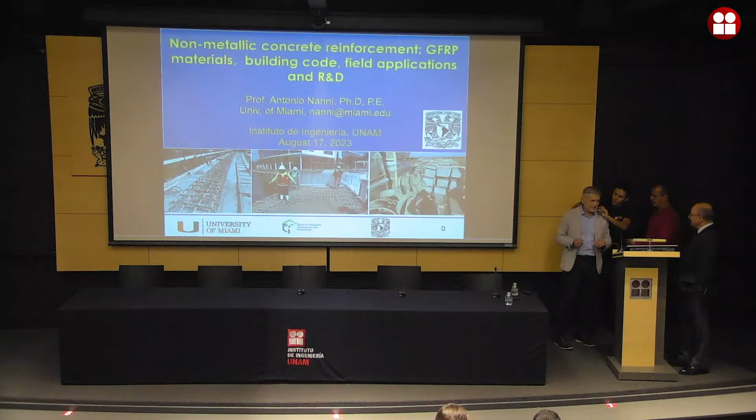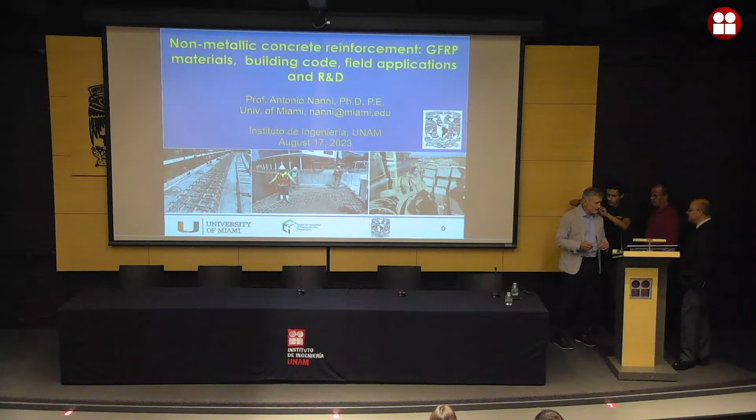That was Ronberg, okay. You will meet him, it's going to be exciting. He's not a concrete guy at all. I think it's going to be great. It's totally different from Ron, but I think he's going to be a great manager.

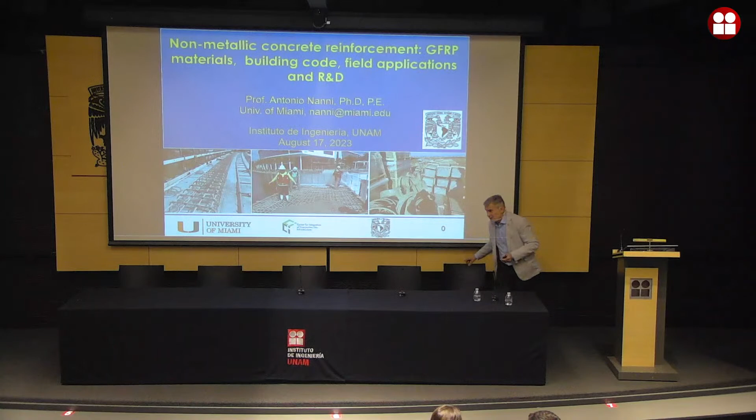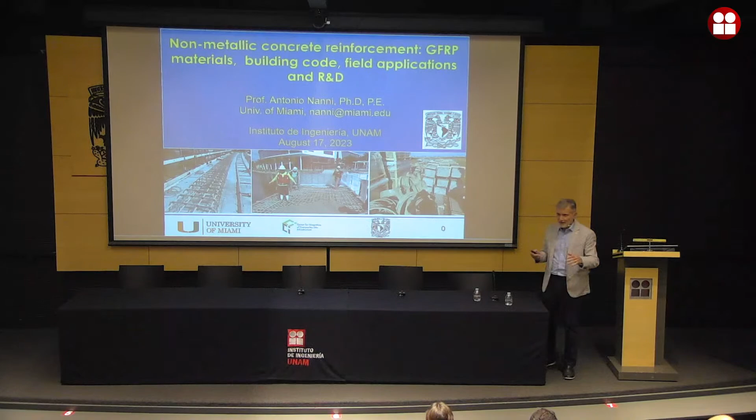So I can switch to English, and actually I typically prepare my slides half in English and half in Spanish. But today, because there are many students, you need to practice your English, so I'm just going to stick to it. This is not supposed to be a typical lecture, it's supposed to be a conversation, so if you see something you'd like to ask me about, I'm at your disposal.

So this is thanks to Professor Alcocer for this invitation. It's great, I've been around, I've seen 3 cities now. This is my second time in Mexico, but it's very, very exciting.

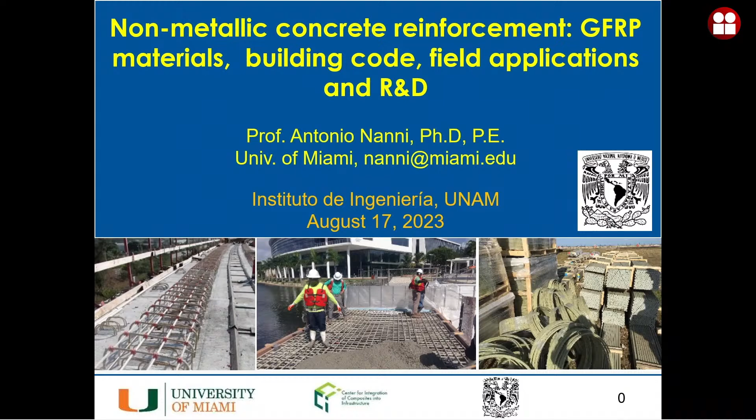The presentation I have today is really broken up into 3 parts, and it's going to be a little longer, but Sergio gave me permission to entertain you if you wish.

So the first part is really letting you know about ACI, what we're doing there, some exciting stuff, and the code in particular. And then I want to show you some field applications, because to talk about innovation without going into the field, without having real application, doesn't make much sense.

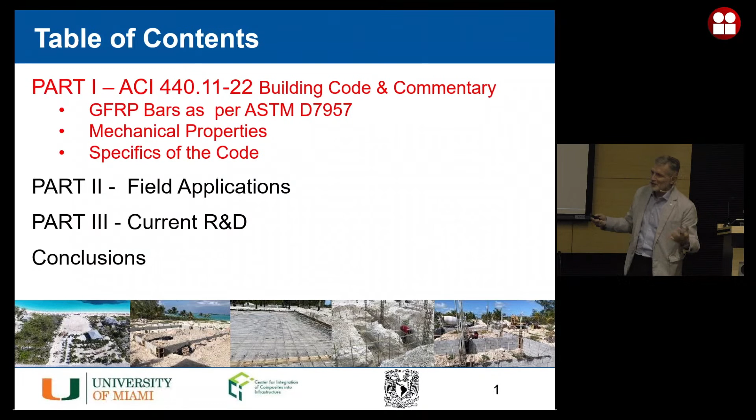And then, because Sergio asked me, I'll show you some of the research work we're doing at the University of Miami. And by the way, I'm in a recruiting mode. So if you're interested in doing a PhD in the United States, he's not looking at me, but he knows that I'm recruiting students. So please feel free to contact me.

And I will present you very quickly 3 little projects related to FRP.

So the topic of today's discussion is really composite, and in particular composite rebars. What are they? Many of you might know, but I'm just going to give you a few slides to remind you. These materials are made of fibers and resin.

The fibers that we cover in the code are glass of the type E-CR, corrosion-resistant E-glass, electric glass. And the resin that we cover is really vinyl ester of all the thermosets available, because of the durability.

The bars that we use in the code, because this is really what we're doing in ACI, follow the specification of ASTM D7957. So we have material specs that help us in defining what is the quality of the bars.

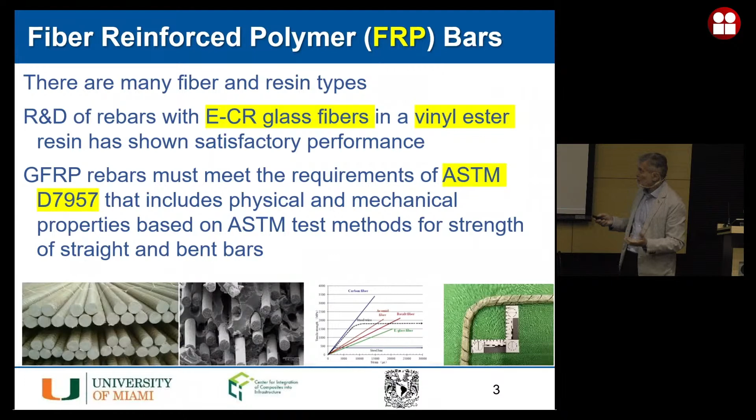The type of bars that you see in this picture are kind of unusual in the sense that if you think in terms of steel, the steel rebar's external surface has been standardized. This is not the case for FRP. They are all different depending on the manufacturer.

And the reason for that is really to give you good bond with the concrete. Without stress transfer between concrete and reinforcement, you don't have reinforced concrete, right? So this is the purpose.

The quality of the bond may not be as good as in the case of steel, primarily because of the stiffness of steel compared to FRP. I'll get to that maybe towards the end of the presentation. So the types of surface deformation could be helically wrapped, ribbed, sand-coated, grooved, all these different things, but ultimately the purpose is the same for all of them.

In terms of quality assurance, if we follow this ASTM D7957, we run tests that are different from the ones you might see in the laboratory. I'll give you an example of only one, this E2160.

This is to measure the enthalpy of polymerization. What are we talking about here? What we need to do is make sure that the resin is fully polymerized. If we don't reach at least 95 to 99% polymerization when the bar exits the pultrusion machine, we will not have the durability that we expect.

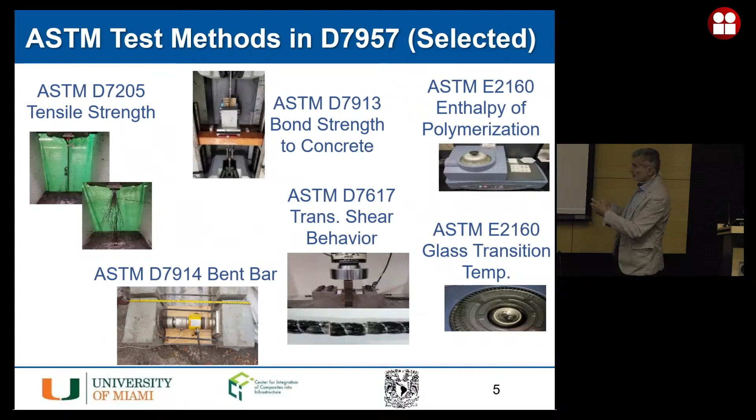So this is one of the tests that we run, and a specification of the standard tells us what is the range that is acceptable.

The D7957 tells you many things. Here I simply have a table to indicate that one of the interesting items is we define the maximum and minimum size of a rebar depending on the denomination. Here you see in yellow an M16, a number 5 bar according to US standards, and you can see the nominal diameter, the cross-sectional area, minimum and maximum sizes, and the guaranteed ultimate capacity. This is measured as average minus 3 standard deviations. So a very, very stringent requirement.

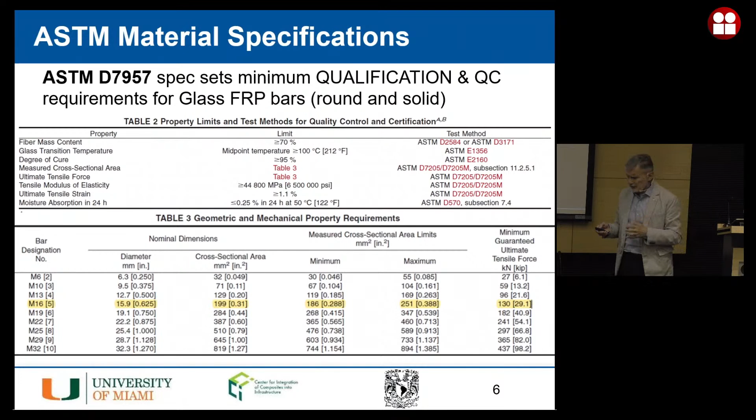One of the issues that came to the table in the 90s, before many of you went to school, maybe you were in primary school or even kindergarten, was the question of durability of the glass as a fiber, because glass does not perform well in an alkali environment, and concrete typically has a pH of 12 and above.

So the issue of durability was brought up and discussed many, many times, but we have finally demonstrated, not only with accelerated tests in the laboratory but also in the field, that this durability is there. The primary reason is not only that the quality of the fibers has improved, we now use ECR glass, but also the protection that the resin affords.

In this project, which was sponsored by ACI itself, we collected samples from bridges that had been in service already for 15 to 20 years. Here you see the various locations. All of them but one, I was involved in their design, so it's something that I knew.

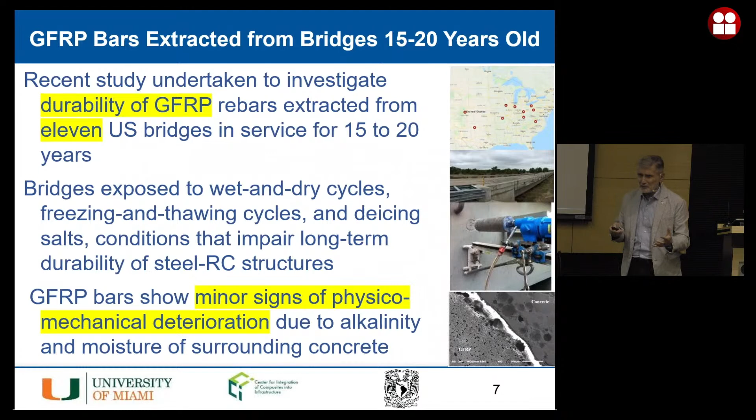We selected samples, brought them to the lab, tested them, and saw that the signs of physico-mechanical deterioration were minor. So we know for sure that if we design with these materials that follow the ASTM D7957 specs, we can assure a service life of the structure of 100 to 120 years. This is a significant jump from what we do with conventional structures today.

So now this is the biggest thing, and this is what we are proud of in ACI. We have developed - all of you I'm sure are familiar in one way or another with ACI 318, because this is the building code for reinforced concrete. Reinforced and pre-stressed actually. But now we have a 318 dependent code.

That means this is kind of the twin of it. But look at the title, it is reinforced with GFRP bars. So now in the United States, since September 2nd, 2022, so not even a year, we have the ability to use these materials in buildings. We have done it in bridges many, many times because in 2018, we issued the first version of the AASHTO design specs.

So the bridges were ahead of the buildings, let's say, by a period of 5 years at least. Why? Because in bridges the issue of corrosion is much more predominant, and also because in bridges you can identify the owners very rapidly.

So this for us was a great event. Not only was it issued by ACI, but 2 weeks after, this became an official document adopted by ICC, the International Code Council. So starting next year, the model code, IBC, the International Building Code, will allow the use of GFRP bars. And if I understand correctly, this is also an appendix in the building code here in Mexico City. So I'm very excited, and I want to see the next building. Actually, Professor Alcocer has promised me that next year he will design a building here with FRP only. So let's see if he can keep his word.

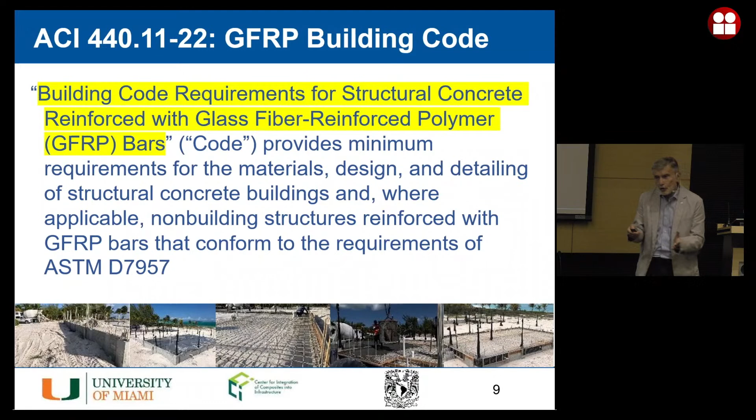Well, the purpose of the code is to ensure safety, right? So this, like if you read 318, is the same reason: provide minimum requirements in terms of materials, design, and detailing. The devil is in the details. So this is really what I should have emphasized, for GFRP bars that conform to the requirement of D7957. And by the way, 2 months ago ASTM issued another spec for GFRP bars, D8505, that covers the new generation of bars with higher modulus of elasticity. Because one of the things you could consider a weakness, but is not, is the lower modulus of GFRP as compared to steel.

So the code is developed—obviously this is a pitch about ACI, we are a technical organization, we are not a trade association, so we work by consensus. This went through all the steps within ACI and covers all the topics listed here. If you're familiar with 318, this is just a repetition. So you have the ability now to design a building, the entire building, from the foundation to the roof with these materials.

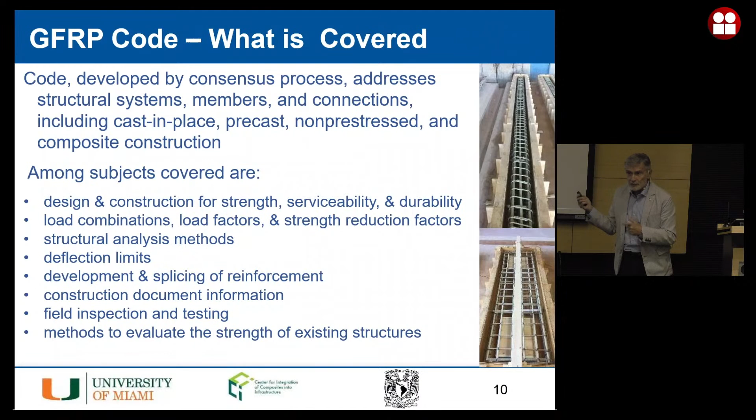One of the things that might not be exciting in Mexico City is the statement that, as of today, because these materials are linear elastic to failure—they're not like steel, which is a blessing of God, a material that's linear elastic and then plastic—the code limits the use of these materials to seismic zone category A. I'm not familiar with Mexico, but if you have 4 categories as we have in the United States, especially C and D, you cannot use this material yet. But I think this is a topic of research that UNAM has to cover. If you want to be in a leadership position in new technology, this is an area. Actually the folks in New Zealand and Europe are starting, so you better move quickly.

I think this is a topic for another day and another discussion: how can you address seismic safety with a material that is linear elastic? Conceptually, this is really a wonderful opportunity. Some folks—and especially I'm Italian—looking at seismic repair, rehabilitation, or renovation of historic structures are now in Italy rethinking the issue of ductility, because of the level of damage you would have in a building after a seismic event. So if we are really interested in sustainability, in terms of having structures that last a long time and require low maintenance, this idea of dissipating energy through damage in a building may not be as sexy as we thought in the past. So think about that—that's a great topic of research.

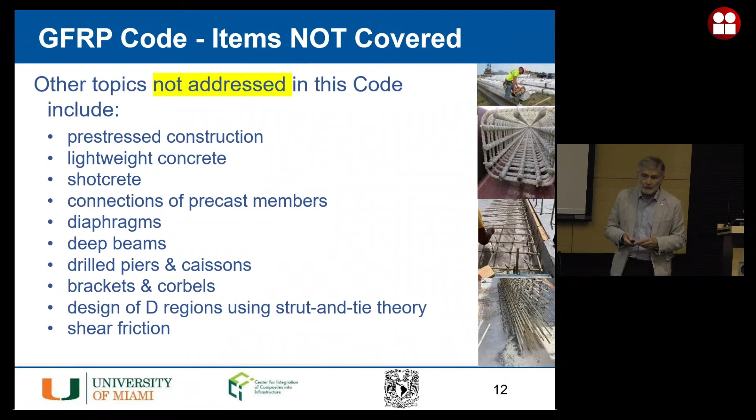There are other topics we don't cover in this code. Why? Because it's relatively new, even though some of us, including myself, spent 30 years of academic life working on these materials. So I always pick this topic: diaphragms. We don't have enough research to say we know how to design diaphragms, but it's coming. The other thing there's a lot of excitement about now is strut and tie design. It's not in the code yet, but there's a lot of effort there because you can optimize the amount of reinforcement in the region. Very exciting topics, worth researching.

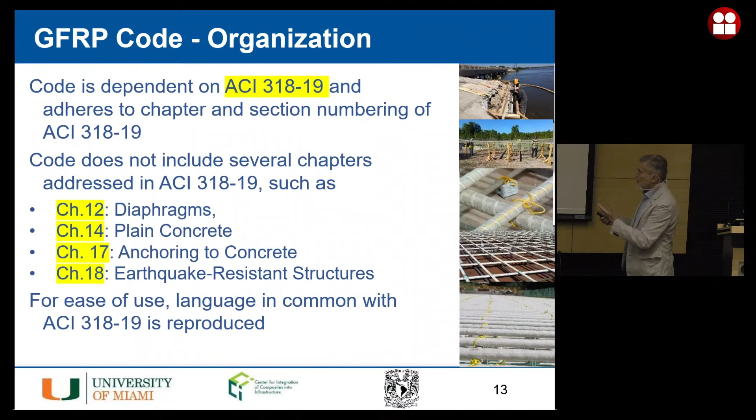So if you go to this code, you will see that some of the chapters are silent. If you go to chapter 12 and compare it with 318, you will see it says 'not applicable.' So be aware that there are some limitations.

The issue of ductility, I'm not going to spend a lot of time here, and I don't want to feel like I'm being defensive here. But because there is no ductility in these materials, we have looked at the issue of deformability. In other words, can you ensure the same level of safety in a structure that deforms so much that it meets the reliability requirements of a ductile structure?

It's a very interesting paradigm, and I invite those of you in the research arena to start thinking in these terms. We have developed phi factors, so go back to your 318, the strength reduction factor that we use for safety. We have made sure that together with the load factors of ASCE 7, they provide the same level of reliability as a steel reinforced structure. So this is very important.

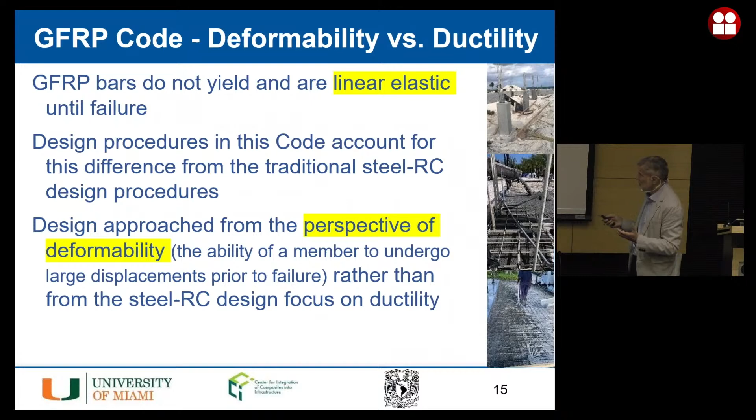Safety is paramount. This is what we have to ensure. This is an obligation, a moral obligation that we have as structural engineers. So this is really something I want to mention here. I'm going to show you some numbers, and I'll let you think about it.

The resistance factors are calibrated for both modes of failure, because we also allow compression, concrete failure, which in 318 would be like, wait, this is impossible. No, we allow it, but we calibrate the phi factors so that we have an even better reliability index. And the same thing for shear.

So the entire point, what is the fundamental reason, what is the background that we provide? It's really comparing the same level of deformability. What does the deformability give us, and how do we compare it with the requirement of 318 in terms of strain? If you recall, 318 says in order to have a steel-controlled failure, you have to have a strain in the reinforcement that at minimum is equal to 5,000 microstrain.

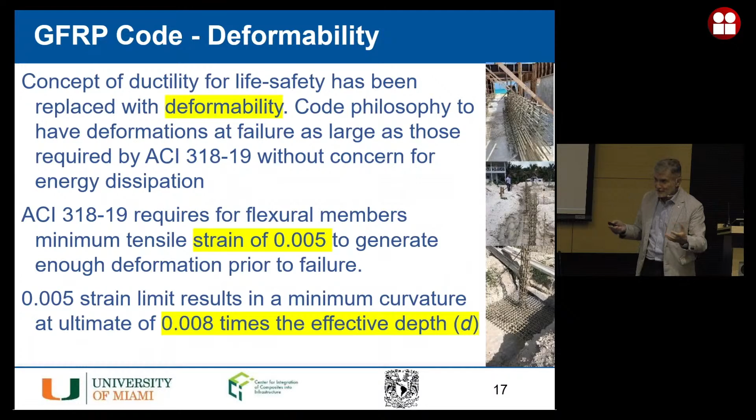We reach that with deformability, imposing a curvature that is 0.008 times the effective depth, which will give you a strain in the reinforcement that exceeds the minimum of ACI 318. So again, this is a topic for very interesting discussion, and that's where you need to challenge your faculty members and ask, does that really make sense? I invite you to have that debate.

I already mentioned this, I don't want to get into that. There was a question the other day when I made the presentation about these large displacements that these structures undergo before a failure, which are the expression of the potential failure.

But there is a great advantage. I know that Sergio in his youth was also interested in masonry. This is, for example, for out-of-plane situations, an incredible opportunity, because if the wall does not collapse, which is obviously what we hope, since the materials and the reinforcement remain linear elastic to failure, the structure rebounds. So in terms of repair and rehabilitation, you only have to seal the cracks. You don't have a deformed structure.

So now you have an opportunity to think in a different way. This is the beauty of it. Don't think that just because today I look like an advocate of these materials, you should take my word for it. Think differently. What can you do? Especially your generation, which really has an important charge in life, to address the issue of sustainability. What can we do to attain that goal of making structures more durable, more sustainable?

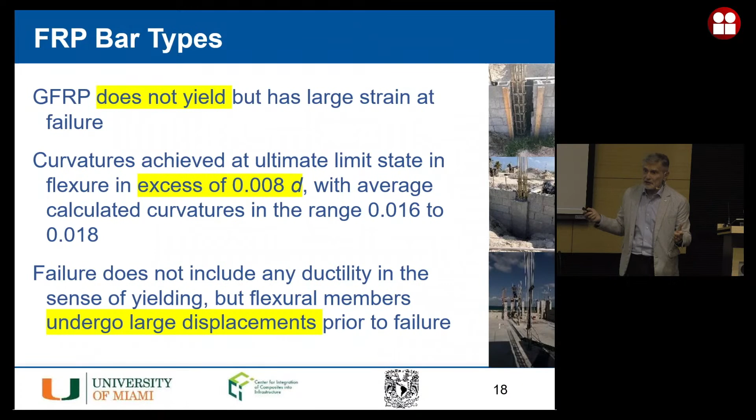And then there is potentially another advantage of these materials that I'm not going to mention in detail today, but it's the fact that in terms of CO2 impact, this FRP is certainly less impactful than steel. So again, these are all things that need to be considered.

You need to be aware of other differences, and this is shear strength, dowel action. I will show you some work that we're doing for the Federal Highway in the United States to address the issue of shear strength. The design procedures have to be slightly different, but fundamentally they remain the same. And because these materials have a lower modulus of elasticity, the issue of serviceability sometimes governs design, so deflection and crack control.

Now you could argue, why crack control if we don't have a durability issue? The crack control is because of aesthetics. You don't want to walk around and see a structure that has a crack that is 6 to 10 millimeters wide that your hand could go through. People feel unsafe, so aesthetics sometimes controls. This is maybe the time to mention deflection. Why are deflections an issue?

Because if you have a material that conforms to D7957, it has a modulus of elasticity of 47 GPa. Steel is 200. The new generation bar is 60 GPa, but still, you could say it's basically less than one-third that of steel. So you have to account for that.

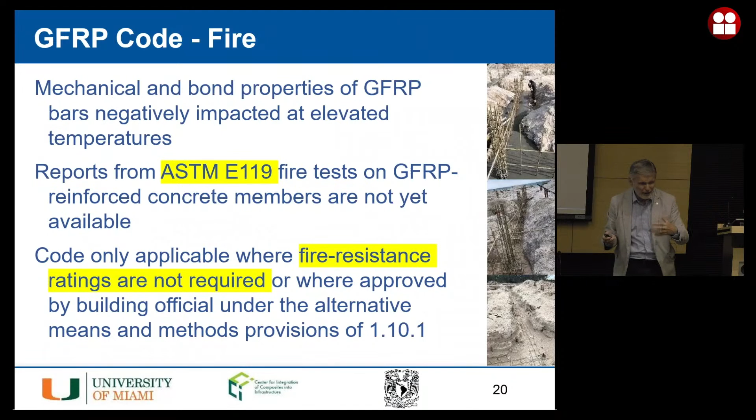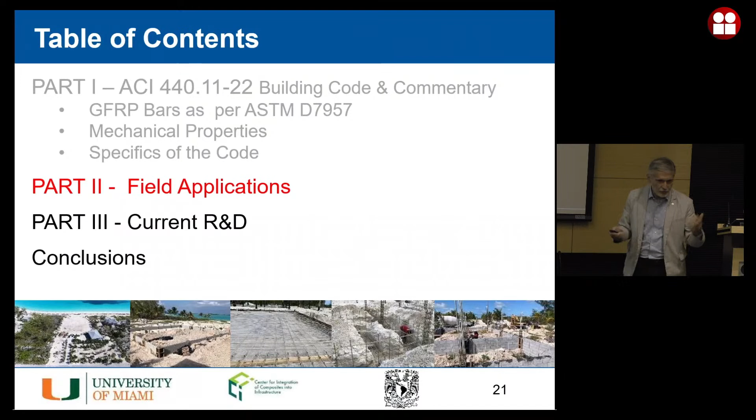So let me go into some field applications. I'll only pick a couple—there are many more, but I hope these are of interest to you, and if there are questions we can go over them. I'll present the ones in red. The first one is this bridge. If you're familiar with Florida and know where Miami is, if you go north a little bit into the county above Miami-Dade, you go into Broward.

This is Broward, okay? I myself do some work, but I'm not the only actor. We built this bridge that is iconic to me, even though the spans are, let's say, modest—26 feet, 16 feet, divide by 3 to get it in meters. It's not really exciting, but there is not a single pound of steel in that bridge, okay?

This is the second one we did in the state of Florida, but it's very dear to our heart because it's a bridge selected by the owner, in this case the city, as the solution for their case. The other one is more of a demonstration project, and here there's some innovation: the bridge deck is continuous with GFRP reinforcement. The other items of interest are that the cast-in-place flat slab is kind of a first, and the precast panels and piles utilize carbon FRP, not GFRP, because in pre-stressing the carbon is much more competitive in terms of performance.

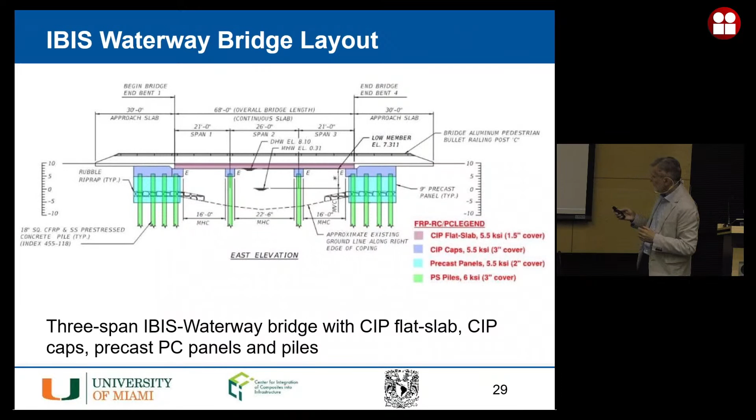This is an exciting project, casting piles with GFRP tendons. These are number 4 rebars, 12.5 millimeters in diameter, that we have in a coil so we could run them for the entire length of the bed, 450 feet. We cast these piles and only pull the tendons to 40% of their ultimate because of this creep rupture phenomenon.

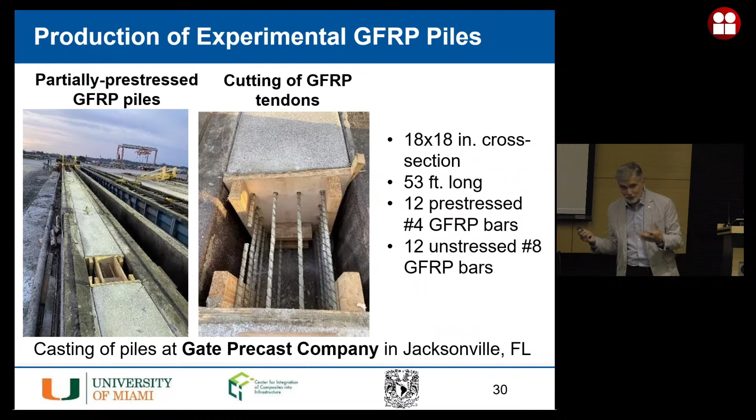This is very interesting for us, because we think there's a future for this in small piles, the ones 12 inches by 12 inches, 24 feet long, used for coastal construction. Just a number: Florida has 9,000 miles of seawalls, and today they're all corroding. So if you want something that will last longer, this is the only option.

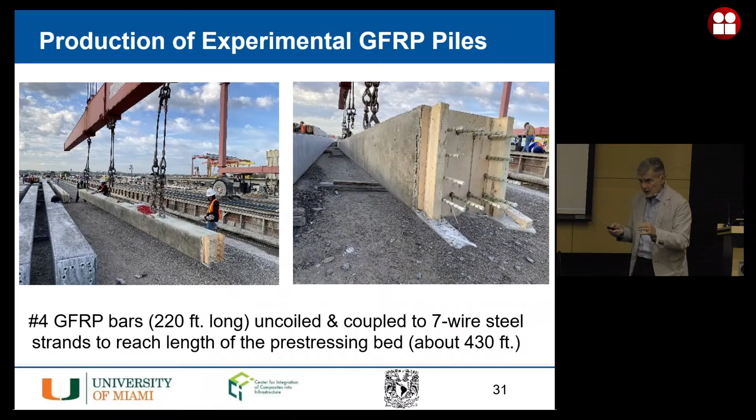These are the piles that are picked up, 18 by 18 inches, the same size as the carbon FRP piles, but we had quite some time playing with them. The items sticking out are the bars we pre-stressed, but inside the pile there's also a cage of unstressed reinforcement - number 8 bars, 25 millimeters in diameter.

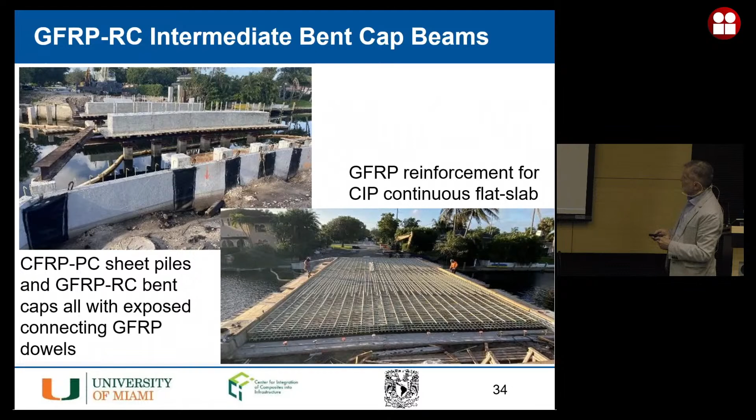Again, completing the assembly of the form is the same thing. The casting, nothing special. Here you see the CFRP sheet piles driven as conventional piles, but look at this - the connection to the cap is with GFRP L shapes, lighter in color. So there's a combination of reinforcement. In the case of piles, Florida DOT now allows you to use carbon FRP tendons and GFRP stirrups or ties. This sea of bars is just the deck - 2 layers, continuous flat slab.

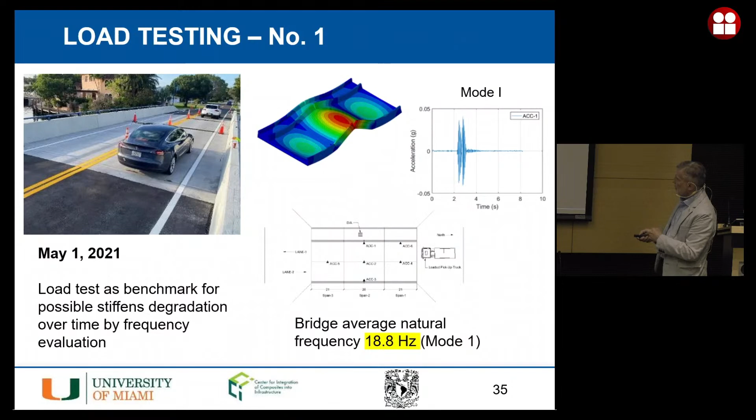Immediately after construction, on May 1st 2021, we went out and did a load test to get a sense of the stiffness of that flat slab. Look at this number - the natural frequency of this bridge. Then we went back a year after and measured again. Instead of 18.81 initial, we're at 18.63, so the change is basically insignificant - we're at 1%. There is no loss of stiffness.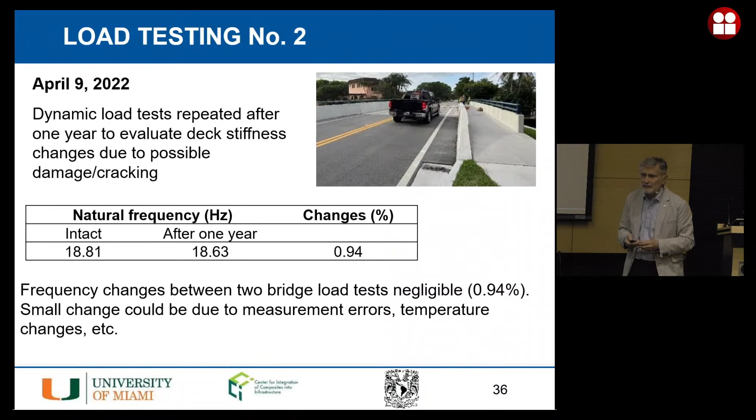Now the idea is to go back after 3 years and repeat this, because we think there could be an interesting topic related to NDT in the future. If you want to monitor the changing stiffness of a structure, that could give you an idea of the loss of stiffness and how much cracking is developing. It's not necessarily a safety issue, but it could be a serviceability issue.

The next one I want to show you was also featured in a CI magazine. I assume all of you are members of ACI. If not, I'm going to leave now.

The students in particular - now I'm wearing my ACI hat. You know, membership is free, right? So how can you not be a member? I hope Professor Alcocer makes this a requirement. When I teach, I don't teach very often, but I teach a class in reinforced concrete, and I make it mandatory for my students - if they don't show me they are members, they cannot pass the class. ACI doesn't make any money out of this, but I think it's all about getting you engaged and involved.

So this is, at one time, another very interesting application in Charleston, South Carolina. It's a different seawall, actually the replacement of the historic low battery seawall that uses more material. When this was done in 2019, early 2019, it was the largest use of FRP. This is a seawall at Flagler Beach.

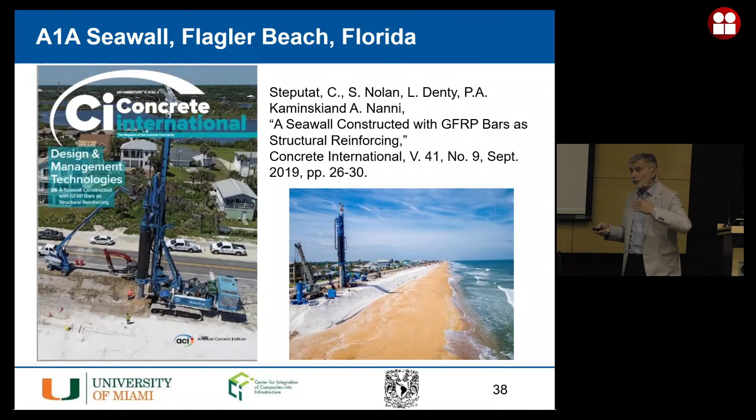If you think of Florida, where Daytona Beach is, a little south of Jacksonville, this is the place. This picture shows the job almost completed. This is the beach, you see the sea, and the wall inside here is made with technology called secant piles. The intention was to cover it with sand so that users of the beach would not see it. The entire purpose was to protect A1A, the old I-95 that connects Miami all the way to Boston.

This is the reason why you need a seawall, which sometimes one could think is not really the best thing to do. Why do you want to build a road here? I mean, but it's already there, and there are lots of people living here. So if we could rethink the way we do planning, I think we would not work this way, but now we're stuck with it.

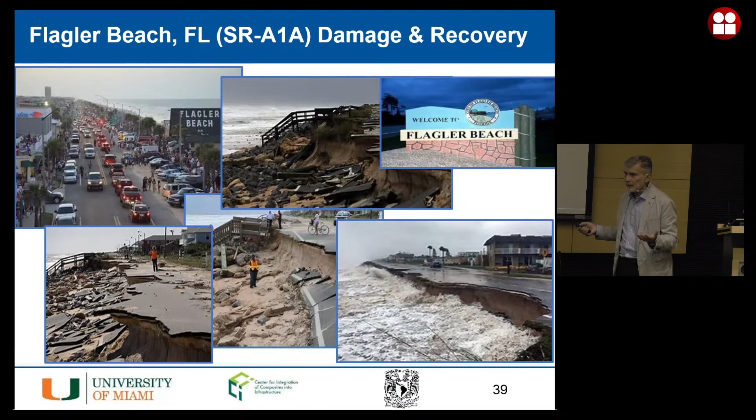So when the hurricane came and washed it away, this is not only dramatic damage, but imagine if you have to run away, or if you have to recover after a hurricane without the road. How can you go and help people? So this is really very important for many reasons, not just for pleasure. So this is the idea.

The Florida DOT commissioned a study to a firm called McDonald in Tallahassee. They came up with the secant pile solution as the best solution, also economically. They had already seen what we did at the University of Miami, where we built a little bridge using this technology, and they liked the idea of using FRP reinforcement for the piles.

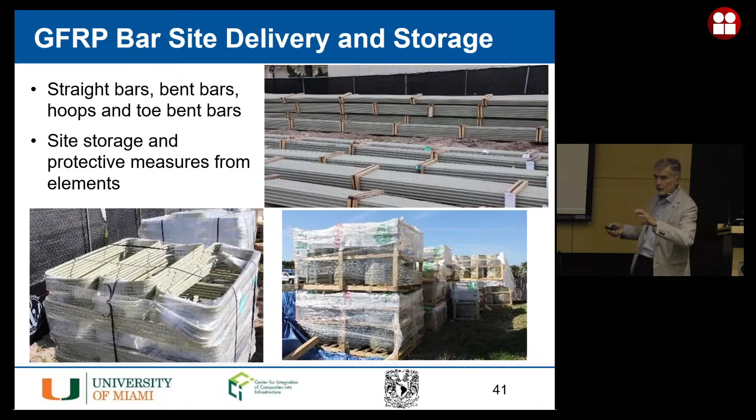Look at the amount of material that is used. You can see here, this is in feet, but it's close to 1 million linear feet of number 8 rebar. So this is the material being delivered to the site. What you see there in terms of bend shapes is for the cap, and this is the cages of these piles. I think it's beautiful stuff to see.

By the way, they were doing it so fast that they had to break up the contract for delivering the grout, or call it concrete, for the piles, because the construction of the cages was going at the speed of light.

If we were to redo this again, we don't need the nose. We used the nose in the project at UM because we were very concerned. Once you fill the hole with concrete, before you insert the cage, this material is lighter than steel, so the concern was, does it go in or does it float? We wanted the nose to make sure we could push it in, but you really don't need it. Actually, what happens is very interesting.

If you go to a job site, you will see... excellent question. You can use either zip ties, but people don't like them. Now there is a company that makes a plastic gun, so you can shoot the same thing that you do with mild steel. In some instances, contractors love the plastic coated wire because it's commercially more available and totally inexpensive. So as long as it's plastic coated, it's okay.

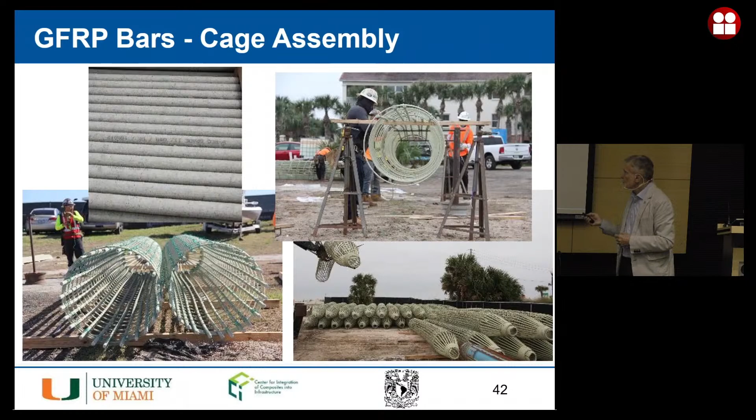So the cages, again, very nice, very quick. This is the application. The contractor was very smart in terms of the preparation of the guide wall. Imagine a secant pile: you cast the short piles without reinforcement first, and then you drill and make the long piles next to it. Very interesting technique, very, very rapid.

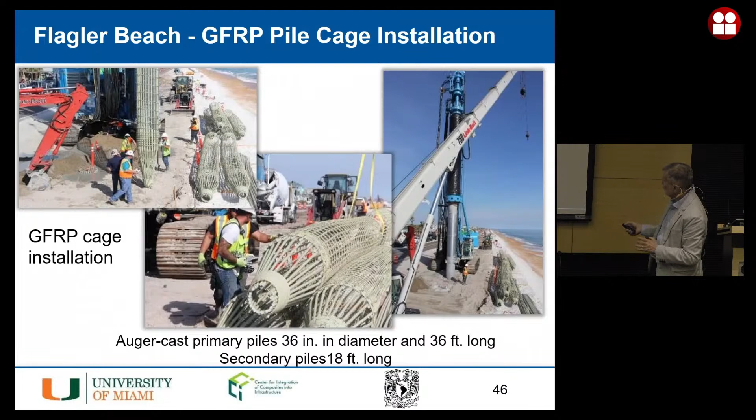These are the piles going in, and this is a beautiful picture of the cage being inserted. One of the reasons the people in that area loved it is because, being auger-cast instead of driven, there was very minor noise. This is certainly not an issue of vibration or anything like this. The buildings are far away, but from a perspective of noise and not impacting the A1A that you see here in the background, it was certainly a positive thing.

This is the cap that you can see being built, so everything is in FRP. Remember this picture, keep that in mind, because I'm going to show you something exciting. So, oops, what did I do? But I did hide them.

Unbelievable, I made a mistake. Okay, what I want to tell you is just, I'm going to tell you a story. If you don't believe me, Professor Alcocer will have a copy of the slides. So the next 3 slides are most exciting, and I don't know, by mistake, I did hide them.

Okay, this is the end of the construction, right? This is covered, you don't see it. You can go to the beach, you walk, and you're fine. Well, what happened in October of last year? A hurricane called Ian came by. And you know what that hurricane did? Removed 11 feet of sand. So now the wall is totally exposed.

It's unbelievable. Okay, and all of a sudden you say, well, I really had very little to do. We did the right thing. We protected, there was not a single crack on the highway. Okay, so the design was done properly. And now the city of Flagler Beach, they announced it just a couple of weeks ago. This was part 1 of a project. Now they are going to extend the seawall to the rest of their jurisdiction.

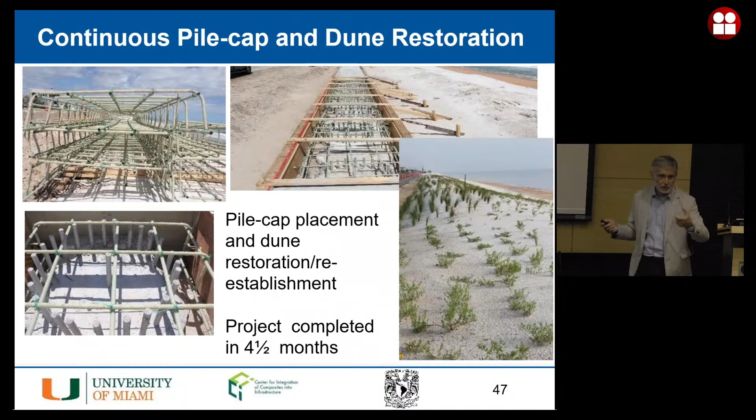So very exciting. If you distribute, if it's of interest, just undo the next 3 slides, and they show this. A pity, but I forgot.

But you know what we did? We used seawater for the mixtures. And why? Because chlorides have no effect. The chlorides depassivate the steel even when you have a pH of 12. The chlorides in concrete, provided that the concrete is durable, right? The only thing that you might worry is not the chlorides, is the sulfates that are in seawater. But that's another story when we discuss durability of concrete, not of reinforcement.

So this is a project. So one of the things that we say in terms of sustainability, now you have the ability to use seawater. Would you use seawater in Mexico City? It's absurd, right? But you could use brackish water, or if there is a hurricane in Haiti, or a hurricane in Cuba or in Puerto Rico, and you have to do emergency work, and you don't have access to fresh water, you can certainly do it with this.

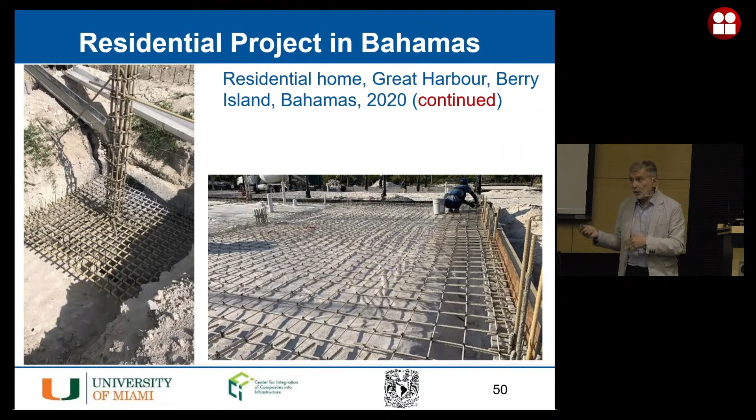This is the FRP all over the place. You can see it in the foundation. But the first picture was dedicated to Professor Alcocer because it's a masonry wall. So now, by the way, not only in the US do we have FRP allowed because of ACI 440.11, but Appendix D in TMS 402, which is the building code for masonry structures, allows you to use GFRP bars. So it's both masonry as well as concrete.

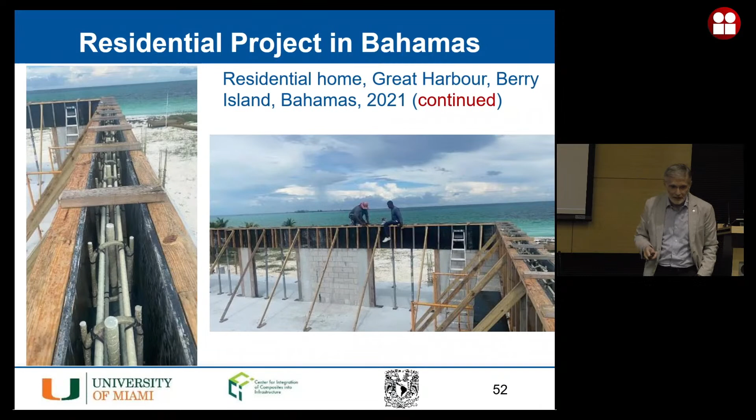So this is, again, the concrete being poured, and you can see the beautiful sea next door. It's a beautiful place, by the way. They only invited me when they were under construction, but now that it's finished, they don't invite me anymore, but that's okay. I think we'll build another one.

Current R&D, if you allow me just a few more slides to tell you what we're doing at the U. I want to talk about 3 projects. The first one may be the most relevant to an ACI perspective, the second one as well, and the third one may be a little less relevant, but very important now in the United States because the majority of FRP goes into flat work.

Trucks and trucks. Actually, if you come to the States and go to Home Depot or Lowe's, you can buy FRP sticks there, and small contractors are using it very extensively because of the lightweight.

Okay, so this is very interesting - interface shear transfer with GFRP bars. Now the code, ACI 318 itself, does not allow the use of FRP bars as a transfer of shear when you have a connection.

This is really a big issue, especially not so much in buildings, but in transportation infrastructure, where you have a pre-stressed girder and then you have to pour a deck and create the continuity and composite action. So it would be ideal to continue with the stirrups so they become the elements for shear transfer.

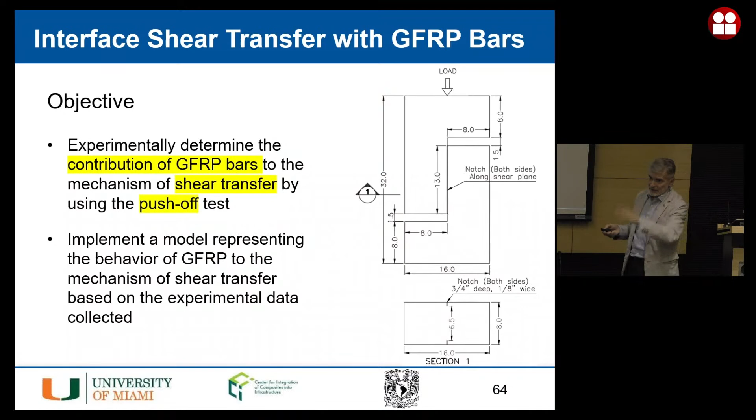I'm not going to show you that - I'm just going to show you some of the experimental results. So these are some of the specimens. Part 1, we have 18 specimens. These are called push-off, very common.

In this case, you have 2 L's, right? You push down, you create compression, but then you have this face where you transfer the stresses by shear. So this is heavily reinforced - in our case, like everybody's case, it's steel - and this has no reinforcement across the shear plane. In this case, you have 2 steel bars, the red ones, and in this case, 3 GFRP.

So this is just the beginning of a study, and our concept - we think that by pure luck we were successful - kind of demonstrated that there is an equivalence. 2 steel bars are equivalent to 3 GFRP bars in terms of performance. You will see why in a minute.

The second part of this study, which I'm not going to report data on, is to create a joint here. Obviously, if you think of the girder as typically pre-stressed concrete with the bar sticking out, and then you pour the deck on top of it, you have a cold joint. So if you cast the specimen only in one shot, you don't have a joint. So what we started doing is create this joint.

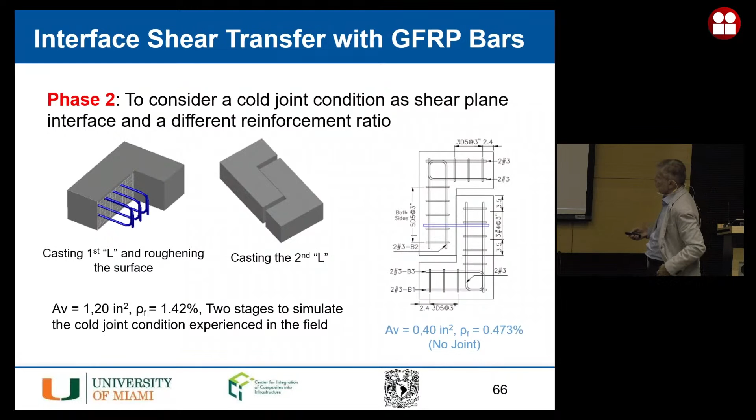We do the first L, then roughen this surface, and then cast the other L, so we create a joint. Then we started playing with different amounts of FRP. If you saw the first one had 3 bars, this is 1 bar. So this is an experimental study to initiate the work.

This is the type of specimen that you see in the lab - it's fairly sizable, you need a forklift to pick it up. Measurements are, as indicated here, LVDTs for the vertical, potentiometers for the horizontal, the opening of this crack. I'm not going to show you videos, otherwise I'll stay here forever, but it's very interesting how this crack forms during the performance of the test.

And obviously there are strain gauges inside the reinforcement to get a sense of how the stress, or better, the strain is distributed along the transverse reinforcement.

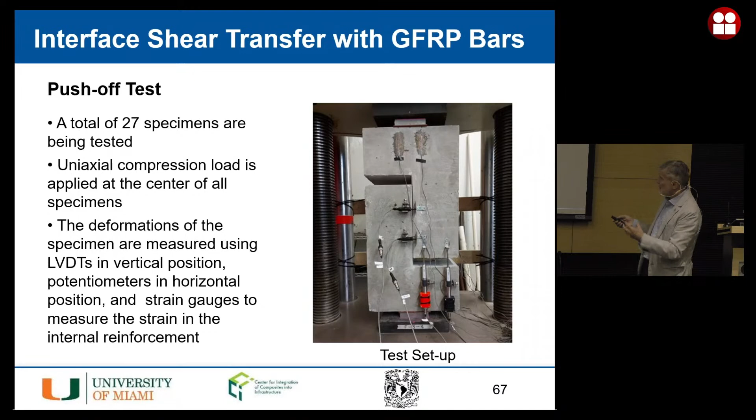So this kind of dispels the notion that GFRP cannot be used for shear transfer, but more importantly, opens up a topic for great discussion among PhD students. Why that ductility? What creates that? We have our theories, but I'm not going to divulge it now. It's in papers coming out.

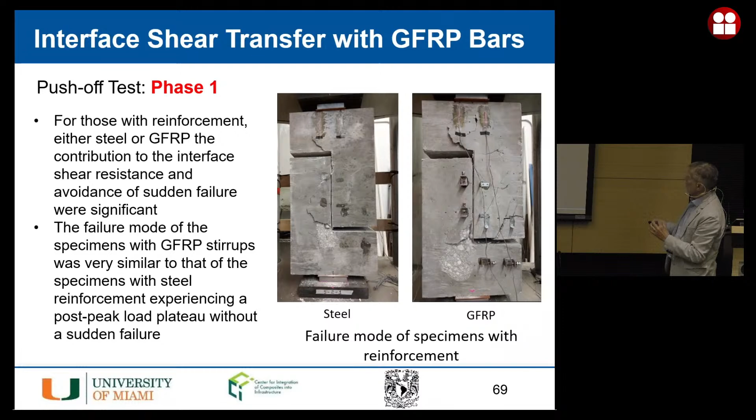So these are the results of phase 1, and basically in words is what I told you. Then look at the pictures. We stop the test after a while, after you have all that deformation. But look at the steel specimen, the FRP specimen. If I delete the caption, would you know which one is which? They are identical, okay? You see that gap that was there to begin with has become much smaller. The crack has opened up, but you don't see anything much different.

The next one is a very interesting study. One of the limitations of these materials is related to the fact that bond is not as good as in the case of steel. Why? Well, if you think of the surface of a steel bar, you have the ribs, right? And then the mechanism of stress transfer is because of mechanical interlock. So the concrete, if you were to pull the bar, the steel rib will push against the concrete, and obviously of the two, you eventually crush the concrete, either because you slip, or because you have cracking, or because the splitting governs, but you never destroy the steel.

Well, in FRP, if you have a bar that, for example, provides you bond because of sand coating, the particles of sand will remain stuck to the concrete. It's almost like, if I were to give you an image, the orange peel - the peel remains stuck to the concrete and the orange comes out. So because of this, you have less bond.

And even if you have ribs made out of FRP, the stiffness of the FRP is much less in the ribs because they are resin rich, so it's almost the same stiffness as the concrete. So you eventually typically break the ribs. Because of this, the development length of a bar is much longer.

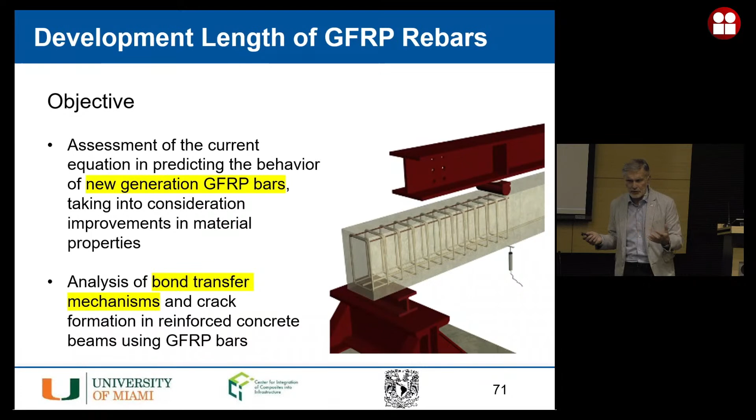Also, the data that our great Carol Shield at ACI used - she was the person who developed the provisions of the code in the 440 document - is more than a decade old, when the old generation bars were used, and now we're looking at the new generation. So she's part of this project.

So in here we use beams that are maybe, I cannot remember exactly, but maybe 6 meters long. I have a next slide. And we use a lot of stuff to consider the parameters that can affect this: the concrete strength, the GFRP diameter, the clear cover, the confinement offered by the stirrups, and the splice length.

This project is done together with the ACI colleague, Brahim Benmokrane, at Sherbrooke University. Our student does all the testing because he has plenty money like you have here in Mexico City. We send the students over there during the summer, not in the winter. Actually, we should send them in the winter because in Sherbrooke, there's not much to do during the winter time.

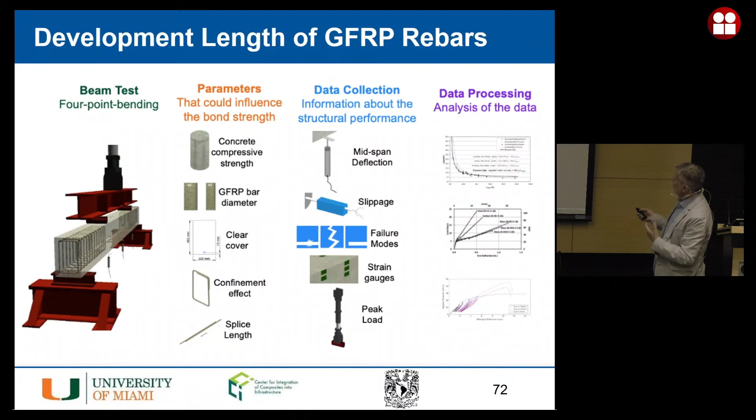So anyhow, that's what we do, and the data that we collect are indicated here, and then we process them. I just want to show you the best thing we're doing, which I think is unique because many have done this type of test: we stick this tiny little potentiometer at the end of the rebar when we are splicing the bars, so we can measure the slip. You can see here how the bar or the potentiometer is protected, so you can pour the concrete. The beauty of this, not only do you measure the slip, but you do not affect the bond of the bar, because when you apply a strain gauge, you have to clean the surface and make it flat, so you decrease the amount of surface that is really there for bond.

So these data are becoming very useful because we measure slip. I just want to show you one case, where we test specimens that have bars that are number 8, 25 millimeters.

The 25 millimeter is the cover, and the bar is a number 5, an M16. These are sand coated, and then we test three splice lengths.

40 diameters, 60 diameters, 80 diameters, and obviously the bar one is continuous. By the way, if we were to use development length for a splice without any factors, any safety factors, the number of diameters would be close to 150. So we're much lower than that, just to see the effect.

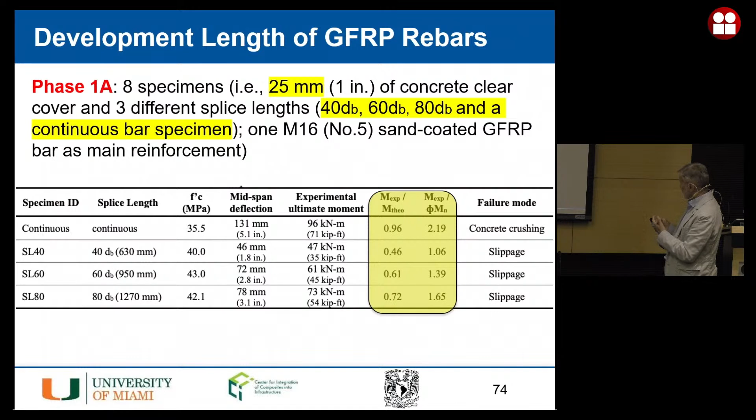And this is the failure, really for slippage, rather than anything else. There is very little cracking due to the presence of the bars.

One thing I'm going to ask you to think about, if Professor Alcocer distributed the slides: if you have some slip as we saw it, why do we not have a degradation of stiffness? We're still thinking about it.

So here we have 3 beams that I'm plotting. Here I have the mid-span deflection, and here I have the load that I'm applying. So this is the continuous one. You can see they all crack more or less at the same point.

By the way, these beams are notched, so we control the location of the notches where the end of the splice is, because we need to make sure we understand how the crack location affects capacity. So they all crack at the same point, and then they proceed with the same stiffness.

Even the green one, which has a capacity less than half of the continuous, does not have a degradation of stiffness. Honestly, I just don't understand it. So help us out, okay?

We're still working on it. We have many more beams to look at, but the performance is the same. Very interesting - so this is your phi MN. If you were designing, even with 40 diameters, apparently you would not kill anybody, but with 60 you would be better, with 80 better, and with the code continuous one, you will do much better.

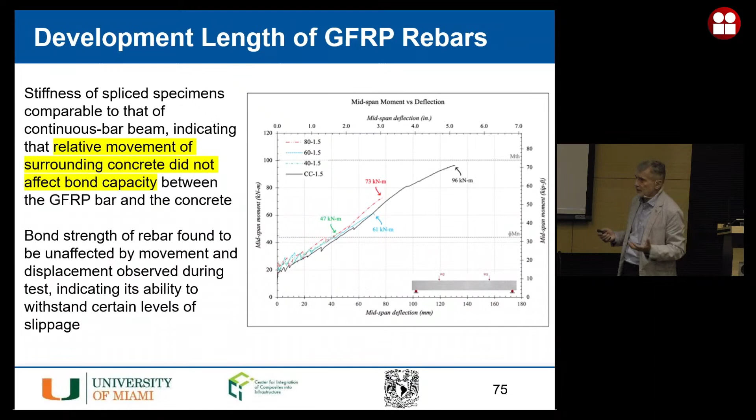What is missing here, which is a topic for a great PhD, is doing cyclic testing. Because if I do cyclic testing and I have slip, that is going to be permanent. So you have degradation - you must have degradation of stiffness. We don't understand why it doesn't show here.

Final item, and then I'll get to the end, and maybe hopefully there will be questions. This is less interesting to you, I imagine, because it's almost a trivial topic - who wants to do slabs on ground? But if you think in terms of amount of concrete, and if I look at my colleagues from CEMEX, a lot of concrete goes into slabs on ground. Therefore, this is an area worth looking at. Why?

Because we want to make sure that you don't have to replace those slabs on ground, and if nothing else, make them more efficient.

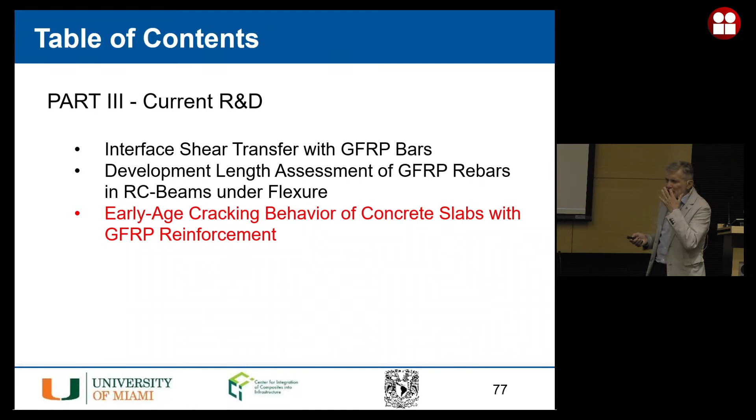So we're looking at one issue that is, in the scheme of things, trivial: early age cracking behavior, the effect of plastic shrinkage. And I'll give you the final part of it, and that's why I kind of take away the thunder: if you want to address the issue of plastic shrinkage, the reinforcement does nothing. Whether it's steel or FRP, it doesn't make a difference. The reason is because you don't develop enough bond strength. When the concrete is in its plastic state, the bar is there just for fun, doing absolutely nothing. When you go into dry shrinkage, that is a different story.

But the work that I'm showing you, we wanted to do this because you might not know this, but I think it's nice if you want to do some work related to code. Chapter 1 of the building code, sorry, the model code, says that if a technology or material system is not mentioned in the code, you can still use it, provided that you have what we call an ESR, an evaluation service report. So if you have a report that shows compliance with the intent of the code, it cannot meet the code because it's something different, right? But if you show compliance with the intent, then the building official is compelled to use it. So how do we address this compliance?

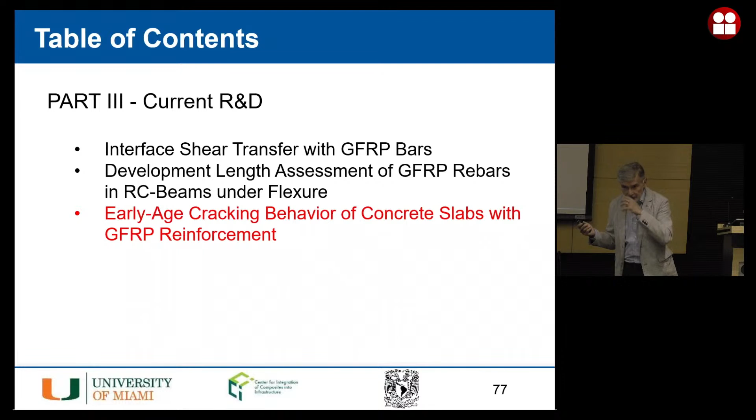There is an organization that is a subsidiary of ICC called ICC-ES. And ICC-ES develops acceptance criteria for new technologies, and one of the acceptance criteria is for the use of FRP reinforcement for crack control in slabs. We wanted to make sure that the tests prescribed in this AC521 - that's the name of this acceptance criteria - make sense. And what we are saying is it doesn't matter how much reinforcement you put there, it's going to do whatever the steel does, because both don't really help in the plastic condition.

So this is the work that we monitor. We have many slabs going on in our area. This is one in a beautiful part of South Florida. Here we are in the Keys, and then you can see the reinforcement here, you see the chair. The workers love it. And you know why they love it? You don't see it here, but one of my PhD students who's monitoring this took beautiful videos.

You see how closely tight the reinforcement is? If you have number 3 steel bars and these guys walk on it, there's no other way, they don't see what the reinforcement is. And even if they did, the foot doesn't fit this hole. They step on it, they bend it, and the reinforcement goes against the floor. What good does it do for drying shrinkage? Nothing. But if it's FRP, it bounces back. So being perfectly elastic to failure could be a great attribute.

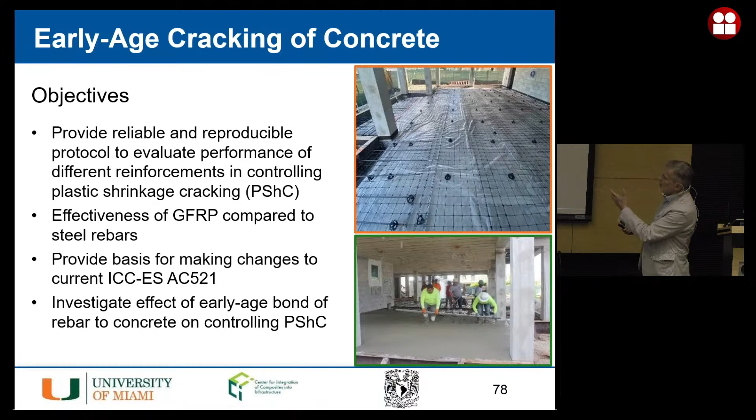So we do this work, in a sense, to validate this ICC-ES AC521. I'll fly through this because perhaps it's not of dramatic interest here. We do a lot of material work at the University of Miami - one reason is, I haven't seen your lab but I imagine it's fabulous, and we don't really have a structures lab. So we are confined to do more material work, and then we go to colleagues to do the structure work. So we took a modified...

C1579, this is an ASTM standard for FRC, fiber reinforced concrete, and we modified it to look at the viability of using FRP bars that could be made of glass FRP or basalt FRP. There is a lot of basalt coming up now as an alternative to glass. The Europeans love it because they claim it's even more benign to the environment. In terms of properties, very similar to glass.

We don't have yet a manufacturer of basalt fibers in the United States. We had one, Mafic, now out of business for a while. So there isn't really an abundance of basalt. The basalt that we use comes from a part of the world under a little stress, meaning Ukraine and Russia. So it's a bit difficult, but once things settle there, or we start manufacturing basalt in this part of the hemisphere, I think you will see that fiber coming up. I think it's very exciting, and it's certainly an alternative to glass.

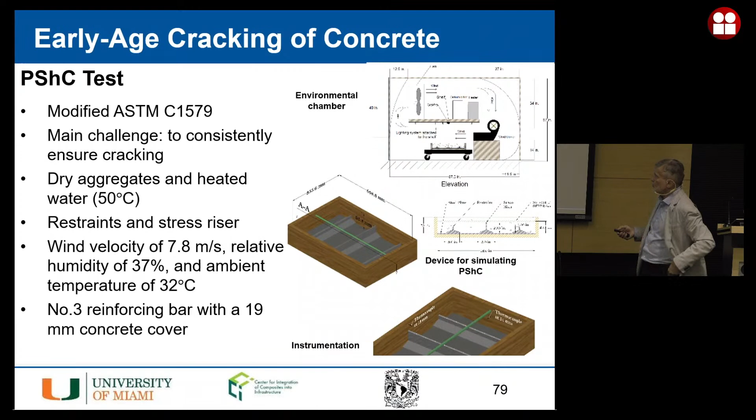And then particularly the welded wire meshes that are commonly used for slabs on ground, we create an environment inside this chamber that is very aggressive. In fact, we even warm up the aggregate and the water to make sure there is a very high heat of hydration in the beginning, and that expansion will then cool off and cause the cracking. So this is some of the tests.

I'm just going to fly through this because I don't think it's easy for you to see. We just got a paper published as I was already in Mexico, and it's actually a collaboration with our colleagues on the West Coast, not the West Coast of Florida, but California, where they do all the analytical work to generate diagrams like this.

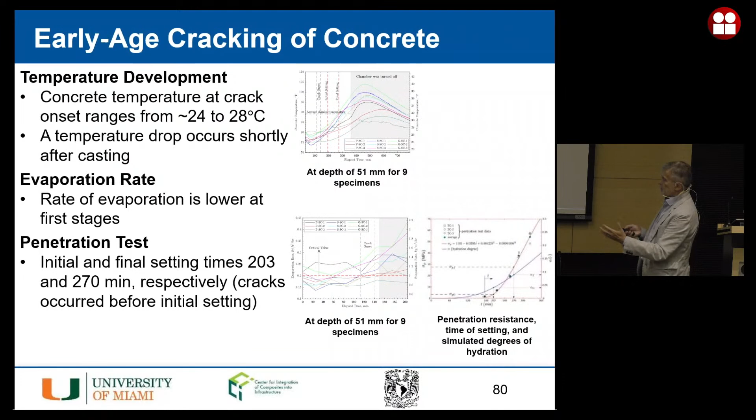So we have measured with a penetration test the setting time, and fundamentally what we're saying is that the shrinkage cracking, or plastic shrinkage cracking, is a function of many things, but the contribution of the reinforcement is practically zero, because before the concrete sets—which takes approximately 3 to 4 hours—the level of bond that you have is insignificant.

So we monitor these cracks, we come up with different methodologies to look at them, and then we measure them. We also have imaging tools that allow us to see where they are. So I think it's exciting, but we are more on the material side.

But the point here that I wanted to make is research has to cover the aspects of structural engineering related to safety, but also don't forget that there is another world that has to do with the way we use materials that have to be economical to society. And this is, I think, a good example.

In order for us to determine and understand the reason why of this performance during the plastic shrinkage, we run these tests that we call early age bond tests. You can see it's very similar to a pull-out test that you do according to the standard, but obviously the concrete has not yet hardened, has not gone through the full hydration process. So you determine the capacity of the bond, and you determine that you really don't have any bond, and therefore if you don't have any bond, the reinforcement is there for nothing.

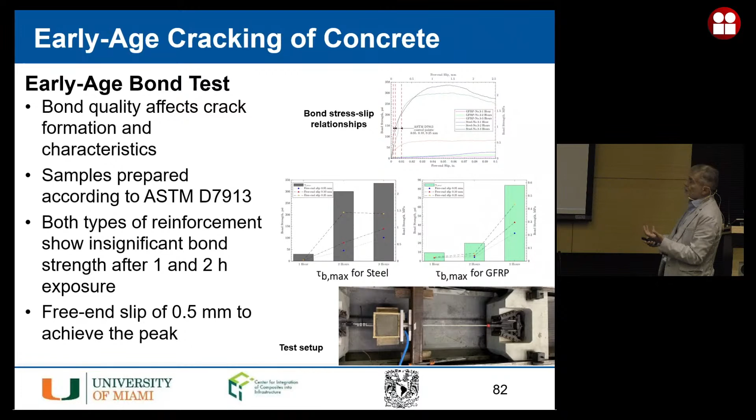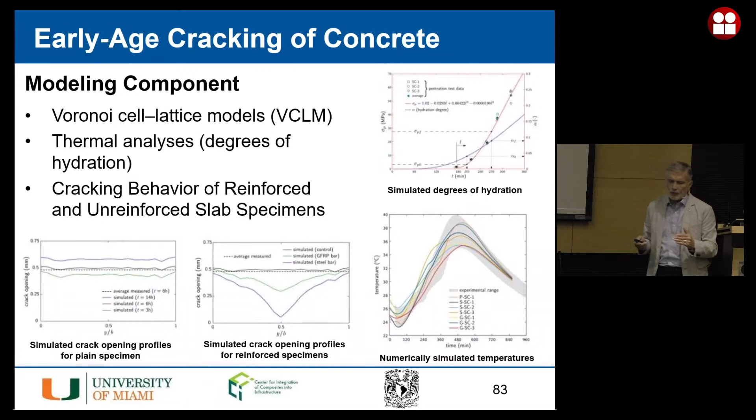So I'm down to the conclusions, and I only have one page, okay? And I think we have a compelling case to say that as a technical community, we should look at these new materials, if nothing else, for structures that are exposed to aggressive environments.

There could be other reasons. For example, there was a question yesterday: if I'm in the precast business, why would I use this? Well, imagine what it means to you if you make panels, and if you now can cut down the thickness of the cover. Instead of 1.5 inches—39 millimeters, whatever it is—if you could go down to 0.75 of an inch, I need enough cover for bond.

I don't need it for durability. Now, you know what it means to shave 3/4 of an inch on each side of a panel? On a panel that is 6 inches thick? Do you know what it means in terms of transportation costs? So this is a compelling reason, and it has nothing to do with an environment where you are in an aggressive situation.

As importantly, not more importantly, GFRP is an ideal material in terms of non-conductivity. So all of a sudden, your thermal bridges become inexistent. So if you have a panel in a sandwich construction—a face of concrete, polystyrene, concrete—now the ties that connect the two panels could be made out of FRP. If they are made of FRP, you don't have any thermal bridging. So again, these are compelling reasons in industries that have nothing to do with corrosion resistance.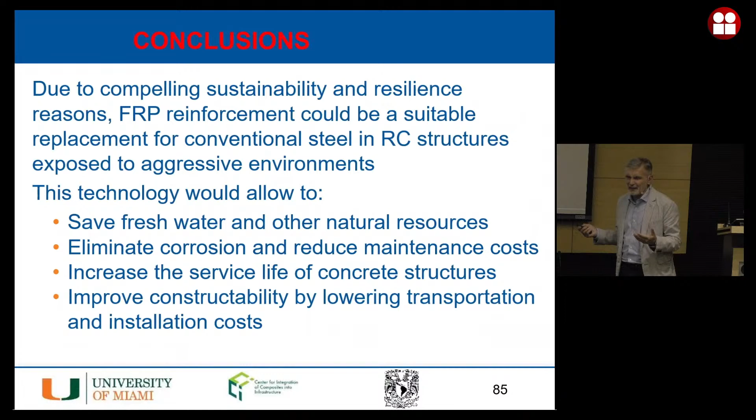Obviously today I only gave you the good things about this material, and maybe next time when I visit you we'll discuss the other items. But I think, in my mind, if you don't have the motivation and the excitement, you don't start from the negatives, you start from the positive. And I think with this, we're done. Thank you very much.

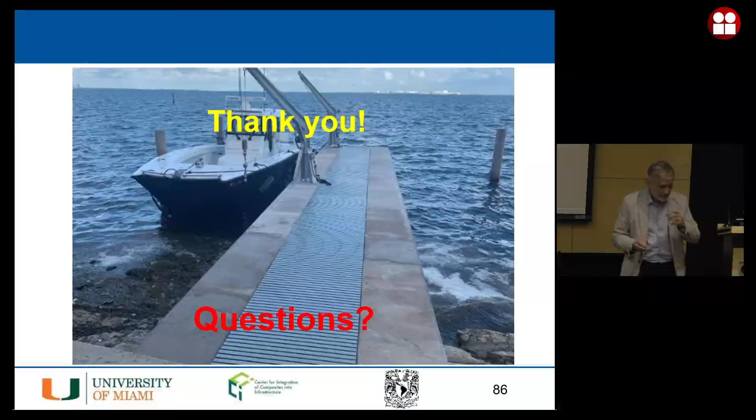Can I take questions? Sure. Do I have any questions?

This, by the way, is a dock built in Miami, Cat 5 resistant, made solely of FRP, including the piles. The piles are not PC, they are RC, and the water used by the precaster comes from Biscayne Bay. So we loaded up a truck. They thought we were crazy because the precaster Coreslab didn't really like it much. The drawback of this, I mean we all love to use seawater, but if you're the owner of a ready-mix truck, you might not be very excited to put salt water inside the truck.

So questions, remarks, comments, maybe.